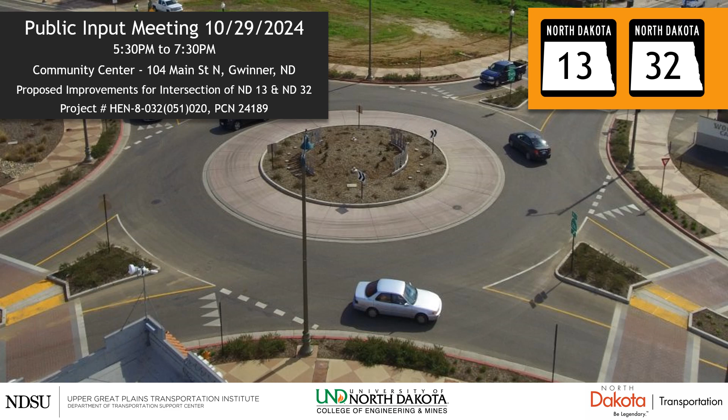Welcome and thank you for joining us for the presentation of a North Dakota DOT public input meeting regarding an upcoming project which will propose safety improvements to the east intersection of North Dakota Highway 13 and North Dakota Highway 32. For reference, the North Dakota DOT project number is HEN 8032 051 020, PCN number 24189.

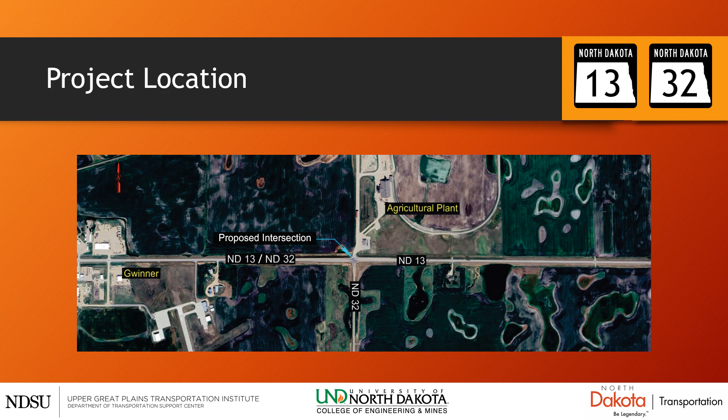Here is a more zoomed in aerial view of the existing intersection. Highway 32 runs on the south and west legs of the intersection, and Highway 13 runs on the east and west legs of the intersection. The north leg of the intersection is a section line approach with the entrance to CHS. Currently, the north and south legs of the intersection are stop controlled, while the east and west legs are free flowing with a speed limit of 65 miles per hour.

This intersection is marked with no passing zones, trucks entering ahead warning signs, and intersection warning signs. The south leg of the intersection also has a stop ahead warning sign and a flashing LED stop sign. There are left and right turn lanes for both east and west legs of the intersection. Intersection lighting is located in the southeast corner of the intersection.

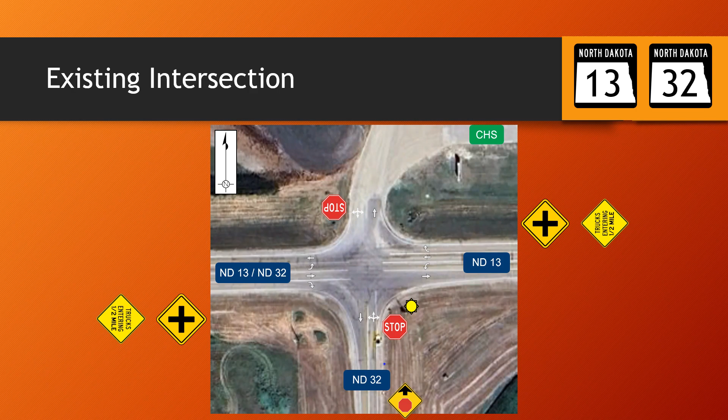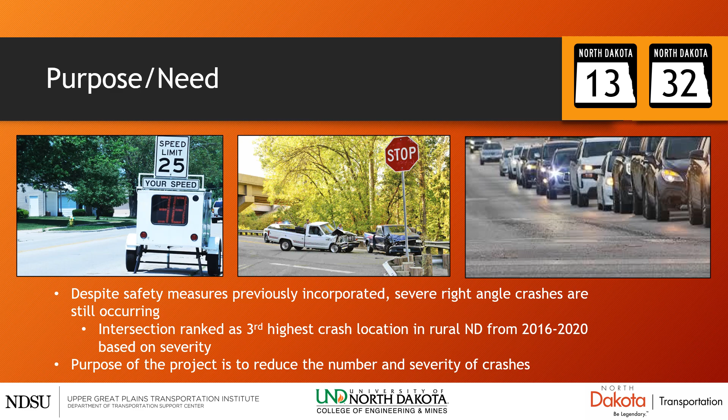As discussed in the previous slide, a number of safety measures have been incorporated at this intersection in previous projects to reduce the number and severity of crashes. Despite these safety measures, this intersection ranked as the 3rd highest crash location in rural North Dakota from 2016 to 2020 based on severity. The purpose of this project would be to reduce the number and severity of crashes. Next, we'll talk about the proposed improvements for this project.

Alternative A is the no-build option. This alternative changes nothing in the project area and the intersection would continue to function as it does today. This alternative does not improve safety and does not meet the purpose of the proposed project.

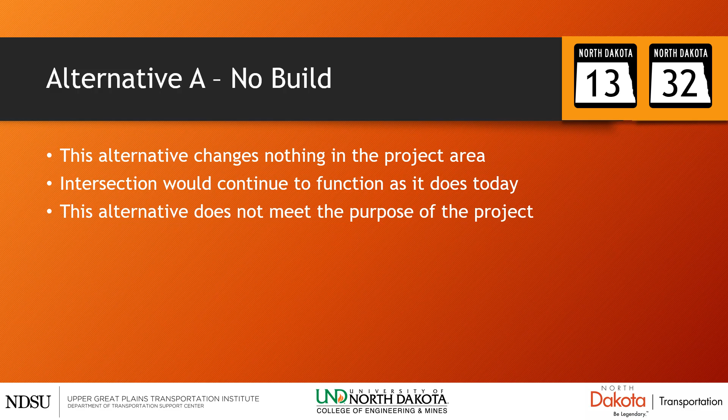Alternative B is the roundabout option. This alternative includes constructing a roundabout at the east intersection of North Dakota Highway 32 and 13. The roundabout would be retrofitted into existing conditions to keep the intersection open to traffic during construction and reduce total cost of the project. Some widening may be necessary to accommodate truck traffic.

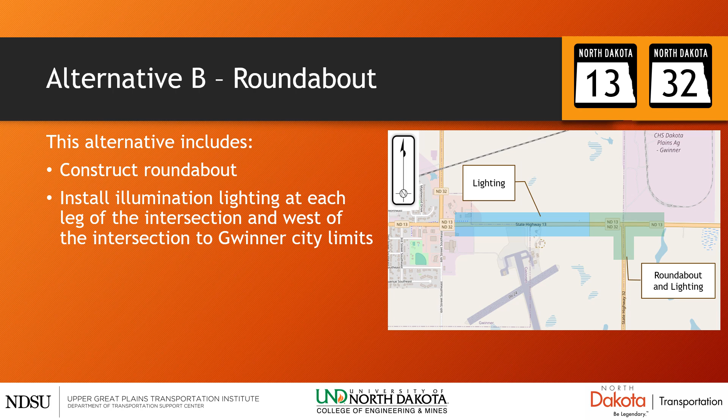To better understand why a roundabout is being considered, it might help to explain what the benefits are. Studies have shown roundabouts to be safer, reducing fatal and serious injury crashes. Roundabouts are traffic calming as vehicles approaching the intersection are required to slow down and yield to other traffic in the roundabout. Increased lighting will also improve nighttime visibility at the intersection.

For maintenance, there will be a difference in plowing for winter weather events. It's important to be patient with snowplows and give them space to clear the roadway for safe travel.

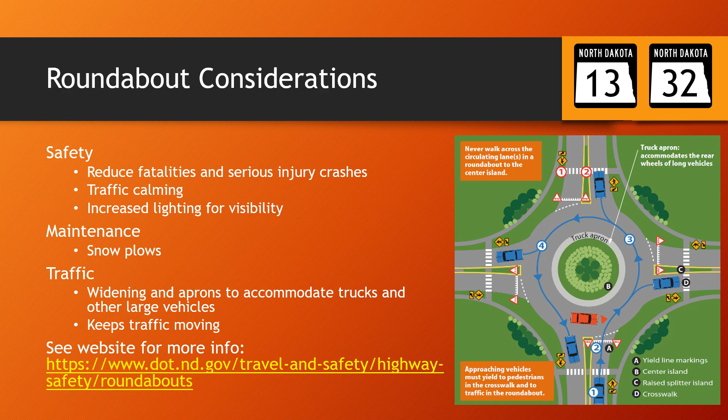Traffic at this location is also being considered. Roundabouts can be designed with widening and aprons to accommodate trucks, emergency vehicles, and other large vehicles. They also keep traffic moving, which could be beneficial for traffic flow during Bobcat shift changes. More information on roundabouts can be found at the North Dakota DOT website shown here.

Project impacts. So due to the nature of the roundabout being a little wider than the current intersection, purchase of permanent and temporary right-of-way may be necessary. This wide nature may also require some culvert pipes to be moved or extended.

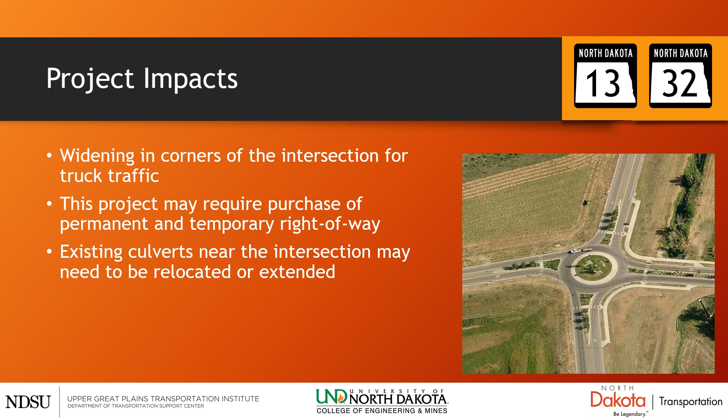Part of developing projects includes the NEPA process. This involves analyzing various types of impacts to determine what effects the project will have, if any, as well as how those impacts should be addressed. There is no noise concern for this project, and therefore a noise analysis is not necessary.

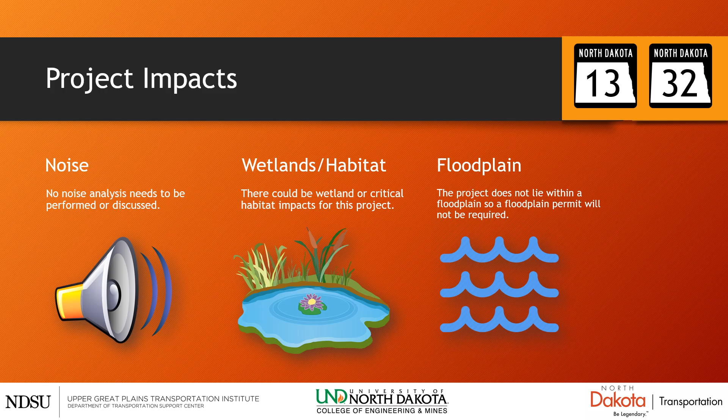The project location could potentially interfere with wetlands if found in the roadway ditches or adjacent properties. A biological review will determine if there would be any potential effects to habitat. Areas of this project do not lie within a floodplain.

Next, we'll talk about the work zone traffic control. Traffic control during construction of the project will occur in multiple phases to complete the project while keeping the intersection open to traffic. Traffic control will consist of shoulder closures for roadway widening and lighting installation, flagging traffic through the intersection, and allowing the intersection to function as a roundabout while the project is being constructed.

Construction will potentially be completed in 3 or 4 phases. The length of construction for this project is to be determined, but based on other recently constructed roundabout projects in North Dakota, this project could potentially be constructed in about 3 weeks or so if everything goes as planned.

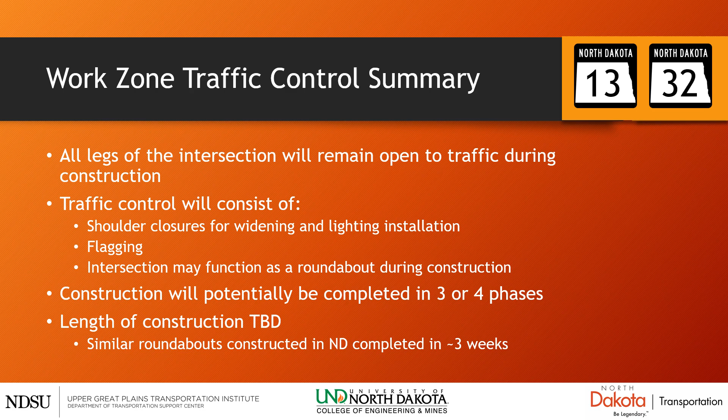For the potential construction phasing, Phase 1 will include any widening to the intersection at each of the 4 corners. Roadway widening will be what is necessary to construct the roundabout. Phase 2 will allow the intersection to function like a roundabout while curb and gutter and the truck apron are being installed in the center island.

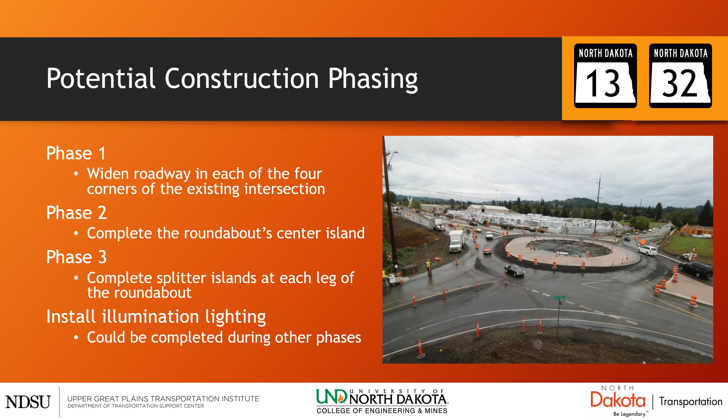Phase 3 will consist of installing curb and gutter for splitter islands at each leg of the intersection. Installation of illumination lighting could potentially be completed during other construction phases.

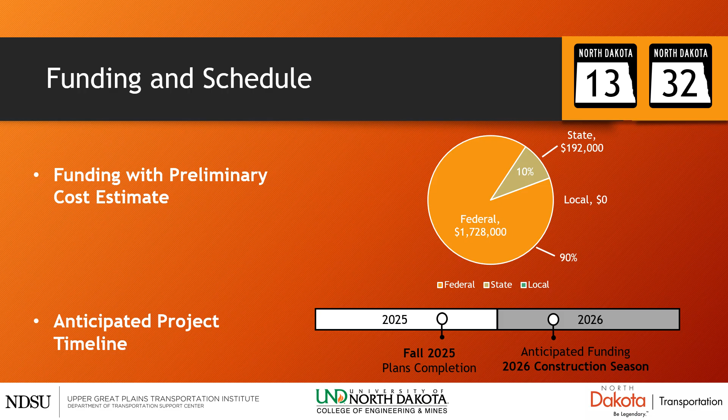This project has a preliminary cost estimated at $1.92 million, with funding to be split 90% federal and 10% state. The project is scheduled to have plans completed in the fall of 2025 and construction date pending on available funding. The soonest potential construction could begin is during the 2026 construction season.

Comment period will be open until November 12, 2024. All comments and input received will be considered, help define the project, and will be incorporated into the design of the project.